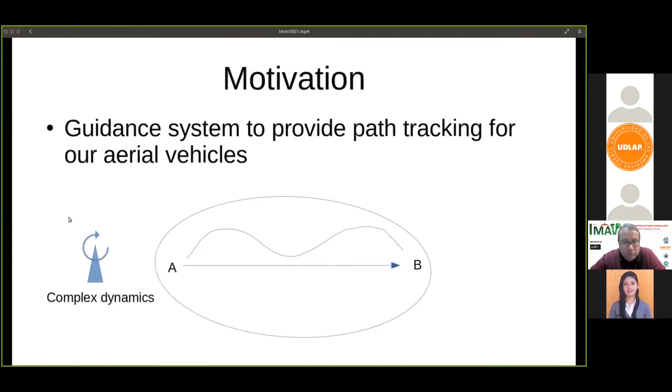So our guidance system must make the vehicle follow such a path, and simultaneously it has to handle the possible complex dynamics of your vehicle, not just a free particle, but something like a fixed wing aircraft. In Paparazzi, we have two guidance systems based on guiding vector fields. The first one, which I'm going to talk about in the next slide, is based on tracking level sets of the desired path. The point here is that there is only one gain, and you can codify simple trajectories, by simple I mean non-self-intersected paths. So you can codify polynomials such as splines, trigonometric functions, sinusoidals, etc.

And we have a second guiding vector field that is an extension of the first one, but it can handle more elaborate trajectories based on parametric equations. However, it's a little bit more difficult to tune, you have more gains, but it only requires maybe one or two flight tests, no more. Once you know the dynamics of your vehicle, it's quite easy to tune, I would say. And we can handle more complex two-dimensional trajectories, such as figure eights, which are self-intersected, and even 3D trajectories, while handling complex dynamics such as those of a fixed wing aircraft.

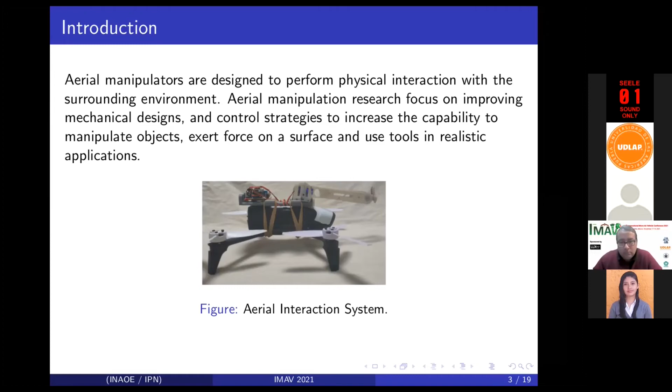At the beginning of the research, we developed an aerial manipulator based on a commercial UAV Bebop2 with a 2-degree of freedom arm and extension legs to put the arm in the lower part of the structure to study the behavior of the system with the added weight and the disturbance of the arm. The manipulator was designed and implemented based on the technical capabilities of the selected aerial platform.

Then, when a stable flight was achieved through a computational compensation control, we improved the capabilities of the proposed aerial manipulator, implementing an external control loop based on a gain schedule PID control strategy to work with the internal Bebop2 controller and mitigate the disturbance induced by the movement of the 2-degree of freedom arm and the contact with a vertical surface.

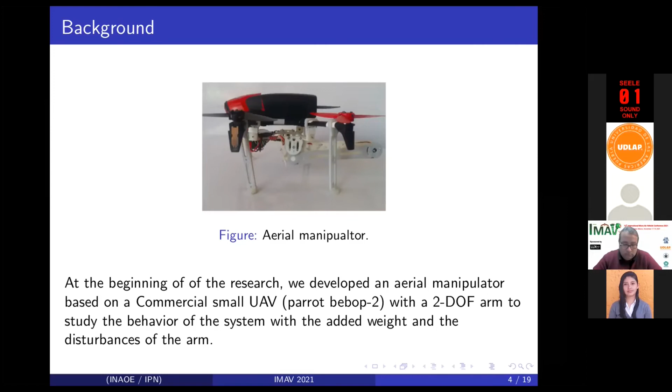For this work, we combined the pose estimation technique based on the Visual SLAM approach with our aerial manipulation system to extend its capabilities to outdoor scenarios where the use of motion capture systems to sense the pose of the vehicle are limited. To improve the results of previous work, we considered the implementation of the immersion and invariance approach as an alternative to the gain schedule PID external control due to its capabilities to increase the robustness of a nonlinear system against disturbances.

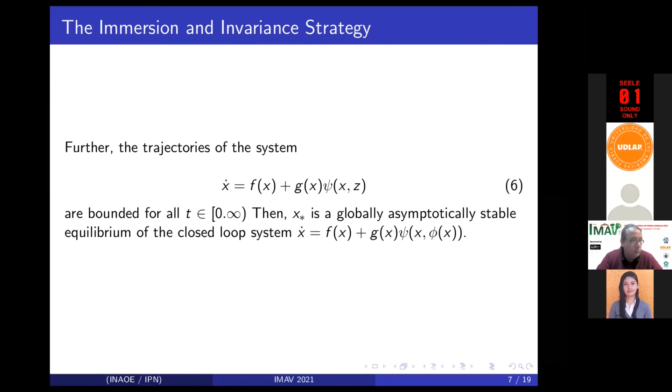Given the system 1 and the target dynamical system 2, find if possible a manifold M described in parametric form by equation 3, which can be rendered invariant and asymptotically stable, and such that the restriction of the closed loop system to M is described by equation 2. Notice that we design a control law U that drives to 0 the manifold coordinate set and keeps the system's trajectory bounded.

Aerial vehicles' internal autopilot shapes the system response at different levels depending on the available sensors. Hence, if rotational states are measured, the internal autopilot can shape the aerial vehicle response as a second-order system. If, in addition, the translational states are measured, the aerial vehicle can be commanded to behave as a first-order system. We can assume that our aerial manipulation system can be represented by equation 7. The proposed controller is expressed by equation 8. Thanks to the quadrotor symmetry, the controllers for the X and Y position are designed following exactly the same procedure.

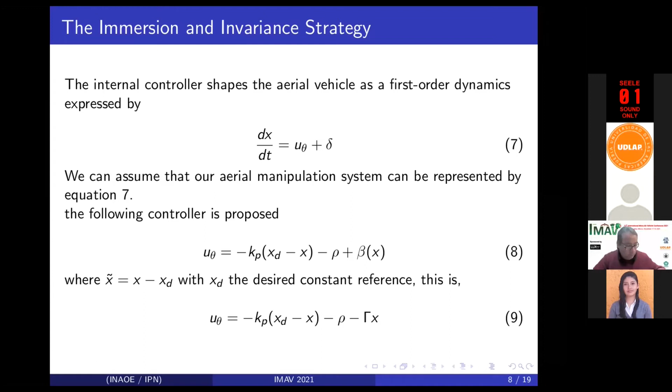To validate the assumption that our proposed aerial manipulator can be modeled as a first or second order system, a set of tests were developed to investigate the response of the system to an input signal. First, the quadrotor was tested to prove that the internal controllers work efficiently. Then we repeat the experiment with the same signal, but now with the robotic arm attached to the quadrotor to compare the influence of the robotic arm in the system.

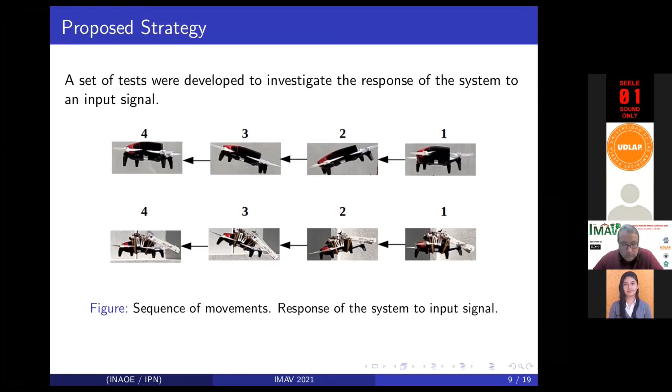The figure shows the sequence of movement the system performs in each experiment when the input signal is sent to the vehicle. Several tests were carried out to obtain a mean result of the behavior of the system in both experiments. The graphics of this figure show the most representative result in the first experiment.

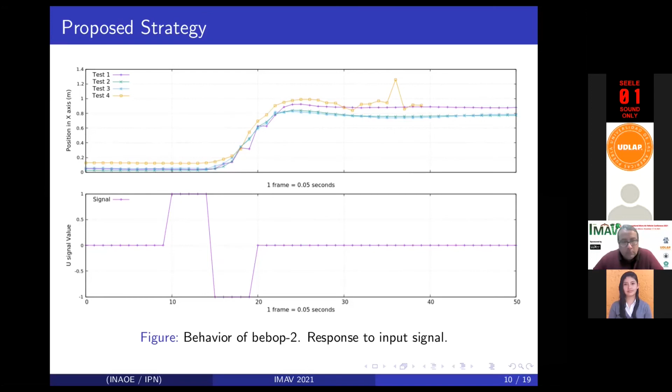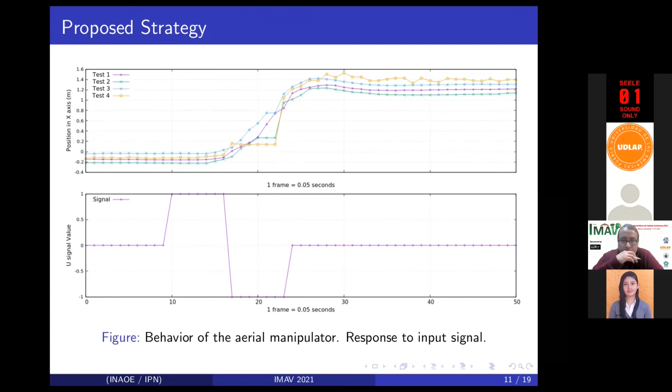The proposed control strategy was proved via experimental tests in an outdoor environment. We incorporate the visual SLAM technique. This method takes advantage of two characteristics of the aerial vehicle, the onboard camera and the attitude measurement. The control algorithm runs in a ground station, and we take advantage of the Wi-Fi and Bluetooth connection to communicate the computer with the robotic arm and the quadrotor.

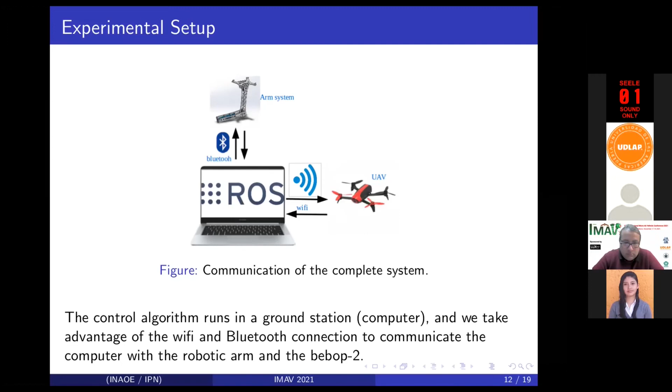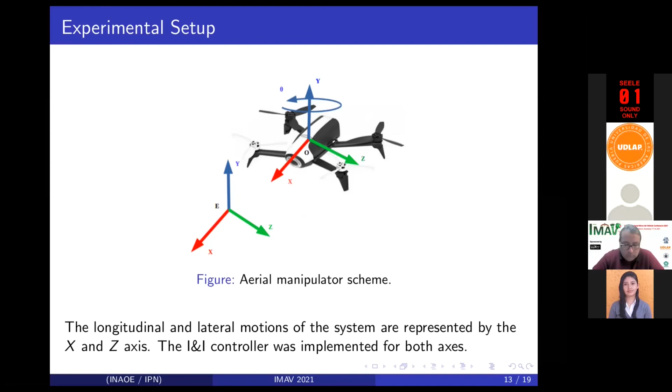The pose of the system when it's in flight mode is provided by the visual SLAM technique. The movement of the robotic arm to fold and unfold produces a set of different disturbances. The objective of the attitude control is to reduce the displacement produced by this disturbance and any other disturbance induced by the outside condition to maintain the aerial vehicle in the desired position. The proposed controller operates as external control, calculating the control signal U for the X and Z axis to displace the vehicle to the desired position. Then, the U signals are sent to the internal control of the quadrotor. Finally, the pose estimation provided by the visual SLAM closes the external control loop.

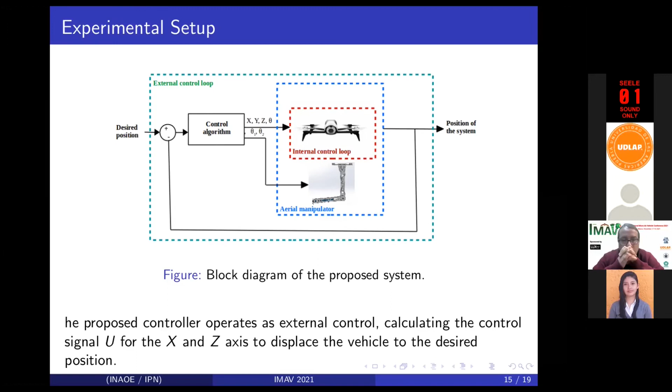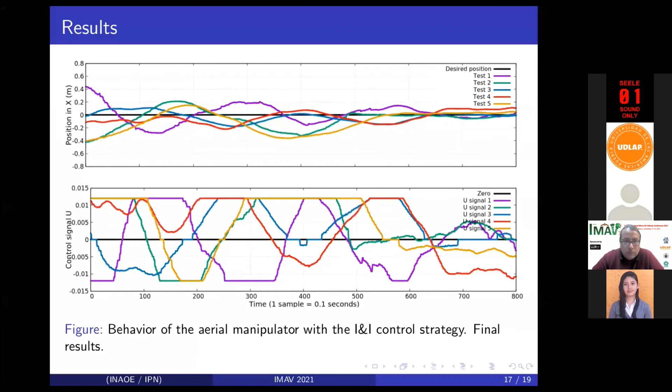In this work, a control strategy based on immersion and invariance technique has been designed and implemented in order to control an aerial manipulator to tackle the issues related to the environment and the movement of the robotic arm. The experimental results obtained for several tests are quite promising. A merit of the proposed algorithm is shown by the equation of the control law, which reduces the number of parameters of the controller, simplifying the experimental phase and allowing to obtain an efficient performance of the system. According to the results obtained in this work, we consider that the control can be tested near to a vertical surface and aiming to make contact with the end effector of the arm. This could represent a novel approach for our aerial interaction field.